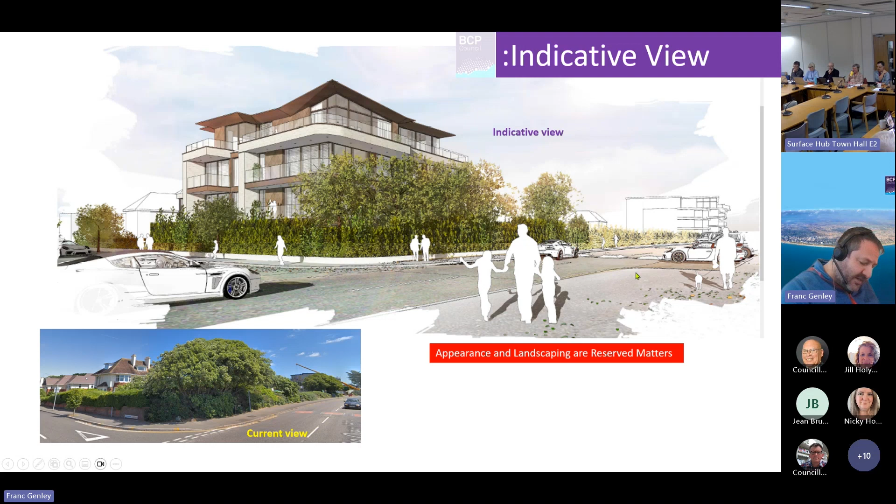So to the proposal. Outline planning permission is sought to clear the site and erect a single block of 13 homes over 4 floors. The proposal seeks to reserve matters relating to landscaping and appearance, so what you have before you are indicative elevations and indicative landscaping. What is proposed is access, layout and scale, which all form part of this submission. The scheme has been reduced in scale and height to the rear since submission, through negotiation, with changes made to the car park, the SUDs, waste and cycle storage, and to the unit mix to increase the number of 3-bed units.

With regards to access, a new vehicular crossing is proposed here, with the existing 2 access points made redundant and sealed back up into proper pavement curb edge. An electronic sliding gate would regulate access to the car park, but not the building. The lobby would have 2 doors, one in the car park and one to the street. Cycle parking is within the building, accessed from the car park. Bins are serviced from the road onto the entrance road, but residents would have access into the bin store area, so there wouldn't be any possibility of people coming from the beach and dumping their rubbish, because we have a gate at this end.

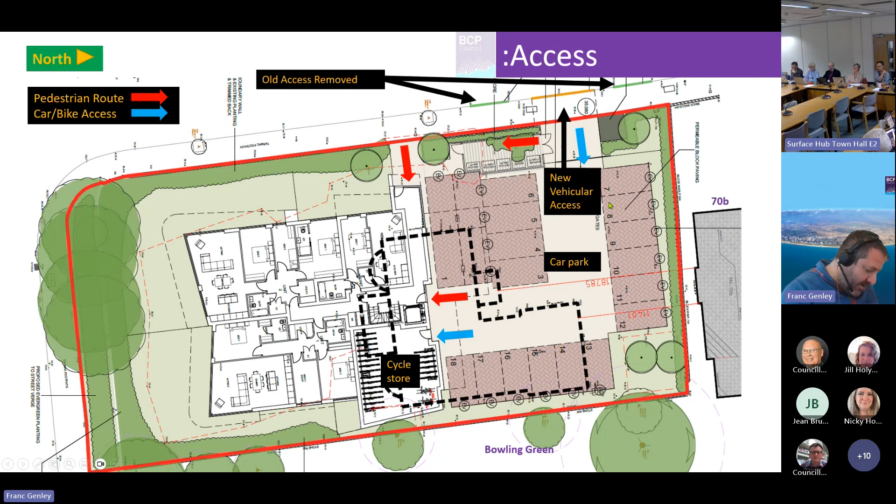In terms of scale, the proposal has a stepped footprint moving away from the rear of number 70B as it moves upwards. The interface distances are set out in paragraph 8 of the report. In total, we have 46% 3-bed, 46% 2-bed and 8% 1-bed, which means 6 3-bed flats, 6 2-bed flats and 1 1-bed flat.

The purple dashed line on these drawings shows you how the application was submitted, and the clear drawing shows what it looks like now as proposed. So there's been some reductions. This is 70B, this is Browning Avenue. You can see some levels have been pushed back further away, and there's been some slight design tweaks to indicate the potential for a bit of a feature on the frontage. Elevations are indicative, but what we're looking at is scale, so the position relative to those buildings is what's being fixed. How the elevations end up looking exactly is for reserved matters.

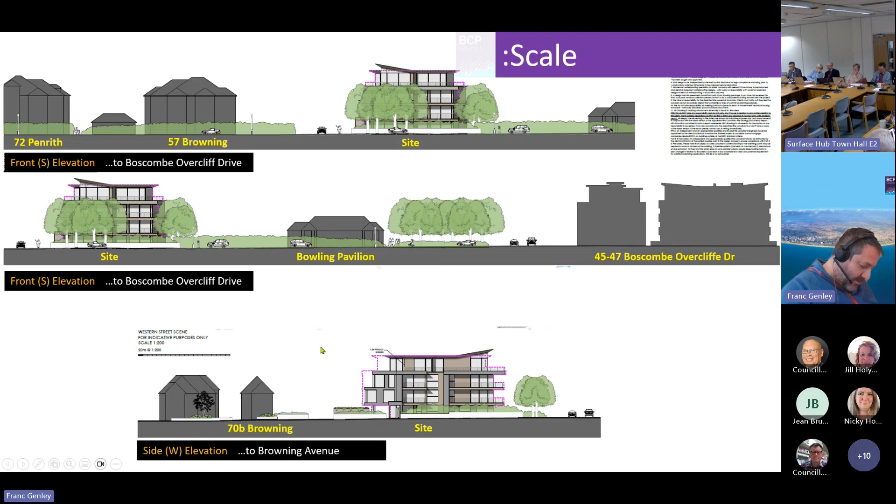Regards to site layout, come back to the plan you've seen before. The property would sit forward of the existing property position. Here you have the dotted line showing the current building, and this is where the proposed building would sit. Just to scan back quickly to the location plan, which gives us a clear view of building lines - you can see here on the top left, this is the position of the block of flats at 57, forward onto the street, and this is the position relative to that of where the building would come forward, sit forward.

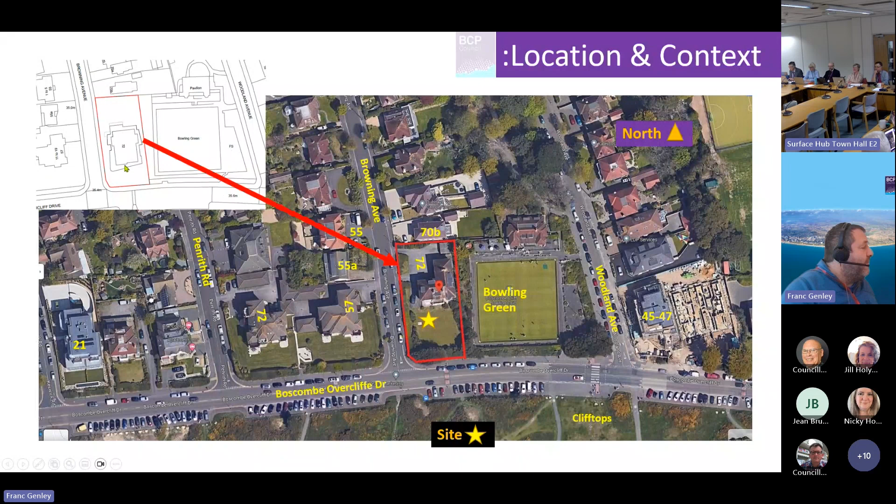Balconies and terraces are provided for all flats, bar the ground floor units which have use of gardens. They're of a practical size. The balconies project outwards, so what you see on this plan, the building line, the front main wall of the property is this - the dotted lines are where the balconies would project outwards. Primary windows would face seawards, south, onto Browning Avenue, or the bowling green, west or east, with limited glazing on the north, so there's not much on the back. At ground floor it's service and access, and then as you rise to first floor, it steps back into the building, increasing the distances.

46 cycle spaces are provided within the building, and 20 car parking spaces are provided. Bins to Browning Avenue, as I explained, are hidden behind walling and planting - earlier plans showed them being underground, but these have been altered now to provide above ground to improve serviceability. The garden area here is to be split into three: this family 3-bed unit here would have this garden, this family 3-bed unit here would have this garden, and this 1-bed unit would have this smaller garden.

With regards to internal layout, you have the plan pack, which shows more detail than this drawing. The flat plan repeats itself between floors, which is good for stacking, so you get fewer complaints between residents due to noisiness. Each elevation would feature windows lighting habitable rooms and spaces. Layout sets the position of those windows, so although we don't have appearance, we know where the windows will be, so we can assess amenity impacts.

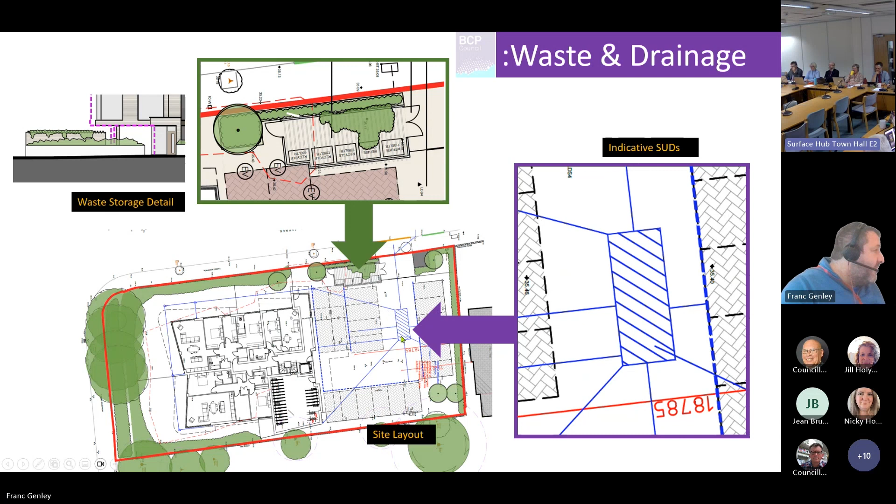This concludes the visual presentation. I want to summarise a couple of things from the report for members so everything's clear. Aside from the usual planning assessment, the report focuses a lot on heritage and the fallback demolition permitted by the prior approval process. Heritage issues are assessed in paragraphs 44 to 45 and 62 to 87 of the report.

There is a fallback position of permitted demolition, and that is relevant to any decision, but consideration must be given to the likelihood of that demolition actually happening. The matter is discussed in full in paragraphs 42 and 43 of the report.

The report, in concluding, sets out 3 policy conflicts. With regards to paragraph 164A, limited weight should be attached to the absence of one number visitor car parking space. With regards to paragraph 164B, limited weight should be attached to the loss of the non-designated heritage asset. Thirdly, since the publication of the committee report, the drainage issue discussed in paragraph 164C has been resolved. The addendum report explains how this element is no longer contrary to policy.

With regard to some other matters, the proposal would provide an off-site contribution of £140,573 to affordable housing, which is a significant benefit. It would also pay standard mitigation payments of £3,310 and a contingency of £5,000 towards off-site reptile habitat rehoming, should this prove necessary as a result of the condition requiring ecology surveys.

There will be no adverse impacts on adjacent occupiers that would warrant a recommendation for refusal. Conditions and reserve matters can satisfactorily control all other aspects for later determination. As a result of the changes to drainage and waste arrangements, a revised recommendation is summarised in the addendum report. The recommendation remains the same, that the need for an additional drainage condition is removed. Changes to the wording of some conditions are proposed, set out in the addendum report. Thank you, Chair. That concludes the presentation.

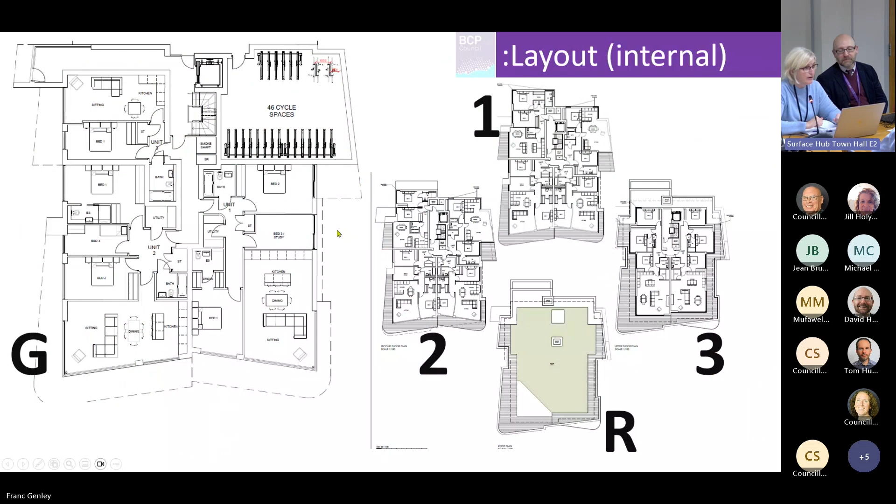Yeah. Yes, Chair, yes, I'll confirm that. If you look at the layout plan, at the top where the access is, there's a dark black line which shows an electronic sliding gate set back, so it would allow a vehicle to be clear of the road before it turns in. So the condition would prevent any changes, or we need to change the condition to tweak it to make sure it wouldn't allow for alterations of those gates, but there is a gate that is currently proposed on site as a sliding gate.

Councillor Rice: And from a planning point of view, do we have any opinion on providing gates to this type of development? Generally, I don't like gates, to make it a gated community, I wondered if we have any opinion on that.

I personally don't like gated communities. I've always in my career tried to not have them, and Bournemouth and Christchurch will have a similar approach that we want communities to be integrated. Here we are close to the sea and the coastal parking, where people attempting to turn or looking for parking spaces may cheekily come in. So the parking gate is considered appropriate here.

You can still be part of the community. That's why the condition words no additional gates, because what we don't want is gates then to be put on for the pedestrian element. People can't nip in with their bag of rubbish from the beach and put it in the bin store because it's locked. But we don't want to stop this building and these residents being part of the community by closing them off.

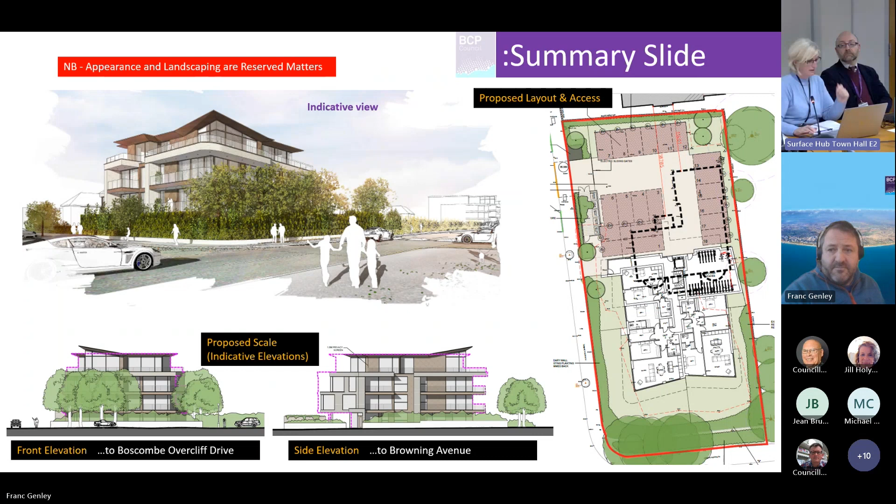Can I just add to that? If you actually look at condition number 1, there is a tree protection plan, an arbor method statement, and a tree constraints plan that's conditioned as part of the approved plans. That would ensure that any existing trees being retained, including those outside the site, would be properly protected.

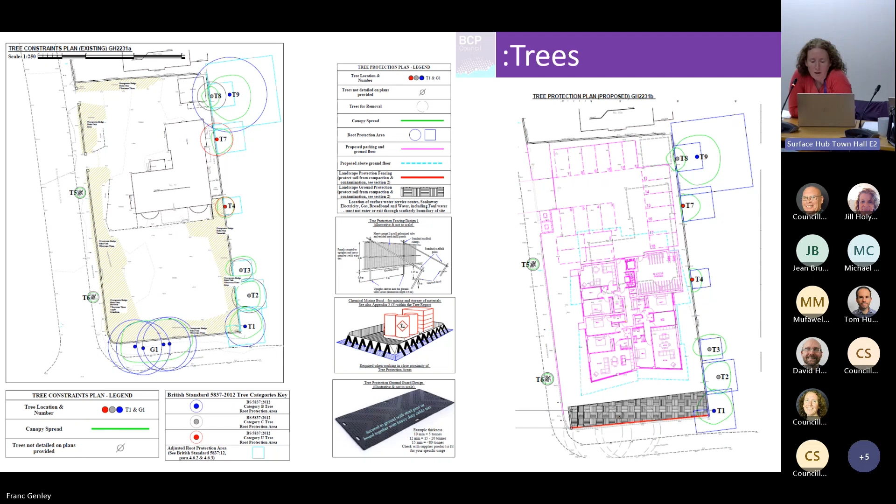Councillor Rice: Thank you. Yeah, just looking at the cycle storage - cargo bikes will be particularly relevant for that area, especially if there's going to be 3-bedroom and 2-bedroom flats, for transportation of small children. There's an over-provision of traditional cycle units. I was just wondering, there's 2 individual stands - I was wondering if there was anything specific, but also is there anything about providing provision of space for electric cargo bikes?

On the plan - and sorry, just one other aspect to that - obviously it relates to the entrance to the cycle space as well. The door is the same width as ordinary doors into the bedroom units, so whether that would accommodate a cargo bike - I wouldn't like whatever was designed there to restrict any of the residents from being able to get one.

Thank you, Chair. Yeah, of course I can. The proposed space is sufficient for 46 traditional cycle spaces. Obviously, at outline stage, we're looking at the general provision and the layout of the building. The internal layout of this is subject to a condition - we want to see more detail of the kit that's going in there, as ever these things are evolving as we move forward. Each of the flats, the spaces for the cars are to be allocated to each of the flats, so there will be a car parking space associated with a flat.

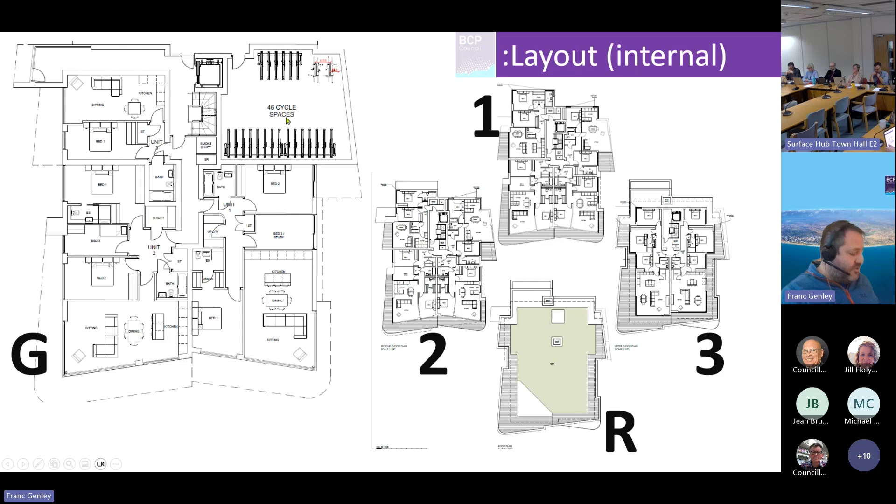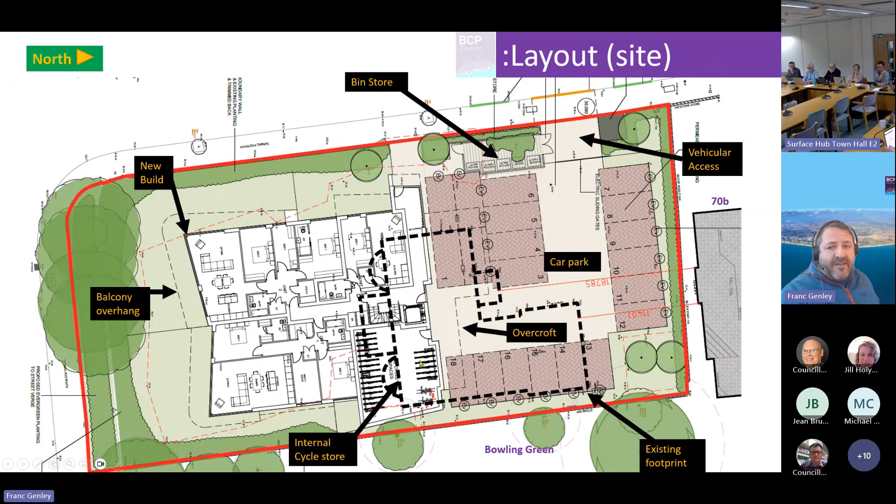The issue is also to do with bin stores. Increasingly the waste team are asking for a space for boxes and detritus, so when you move in or buy a new television, all those big things that don't have anywhere to go. An overflow space is something that's been requested, and we have made provision for it. The same within the cycle area—there'll be provision within the condition to deal with how that mix is going to satisfy the SPD on this, but nothing specifically at this point about cargo bikes.

Thank you. I can appreciate that they could use their car parking space, but I don't imagine they're allowed to put any kind of shed on it to accommodate a cargo bike and protect it from weather, because they're obviously quite expensive pieces of transportation.

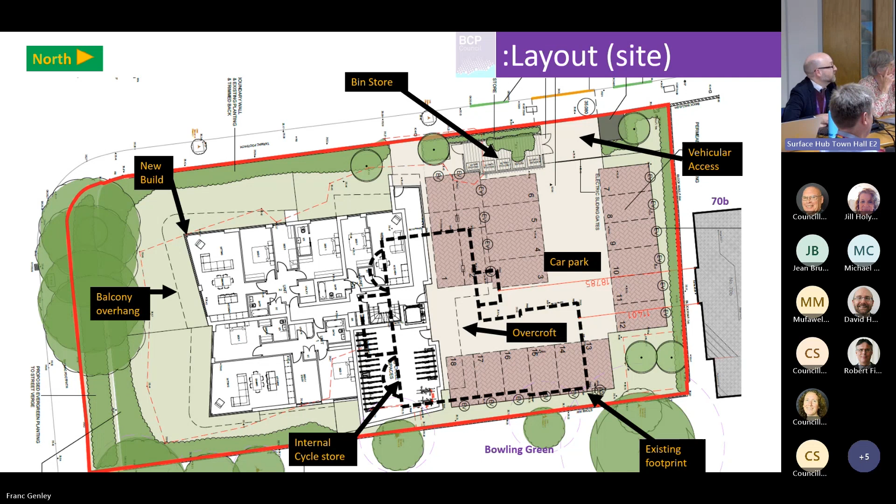So there would need to be somewhere protected from the elements, let alone theft. But can we add a condition that cargo bikes are considered for the cycle storage? Off the top of my head, I don't think that's in our adopted parking SPD in terms of requirements. So what we would do is consult with highways officers when the reserved matters come in, so we can make sure it's ticking the box as far as our adopted guidance is concerned. The chair would be going beyond what we've adopted as guidance to ask for something that isn't in the guidance at this stage, so we can't.

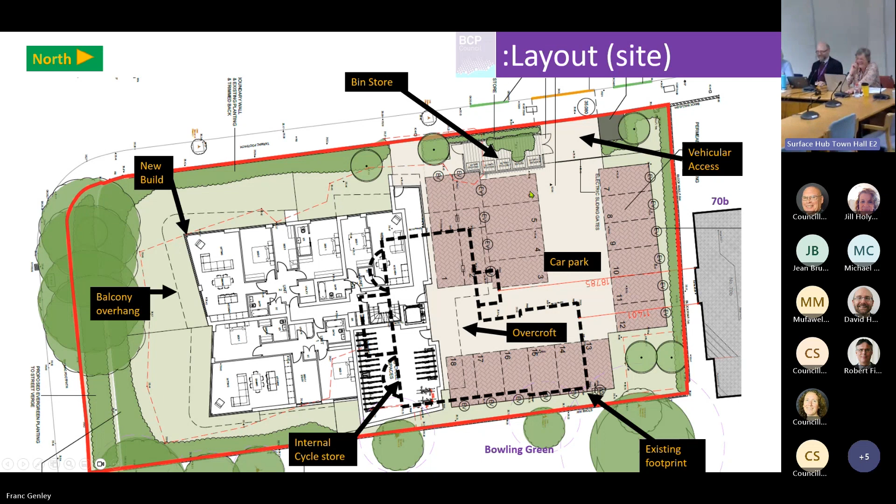But the applicant has heard the discussion. So if there's no more questions, I'll open the meeting up to debate.

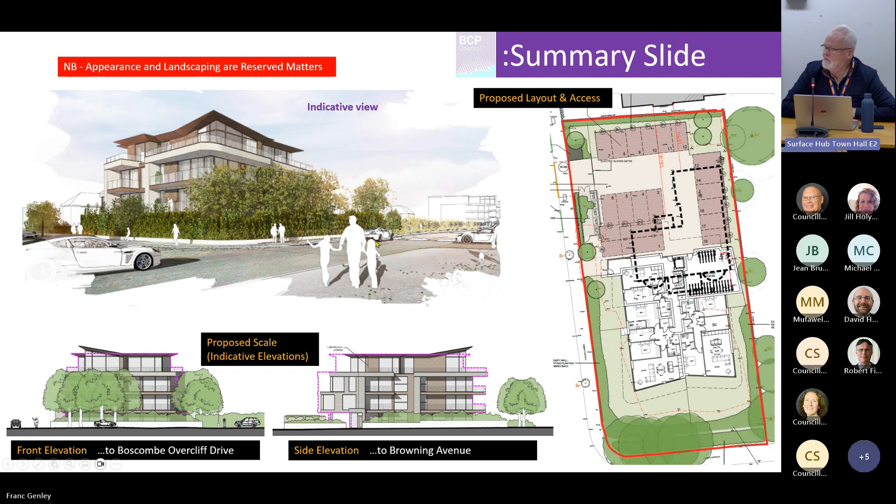Councillor Sidwell: I think this is a unique proposal in my time on this committee for actually having affordable housing spend, full EV chargers and solar panels. The thing that troubles me is what it looks like, and that's why I mentioned the heritage aspect, because it does seem like we've taken more notice of recent developments as opposed to historic ones, and I would have liked to see a nod towards the property it's actually replacing. It just feels a shame to look and say it's the same as all the others. Do we really like all of the others?

Other than that, there are some things here we'd love to have seen on previous developments, so I can't complain about that. To be fair, I think the report says they don't like all the others—the officer doesn't like the ones across the road, that's my reading of the report. It's still very modern, and it was pointed out it's in keeping with the modern developments of the noughties.

Councillor Tarling: Yes, thank you. I'm going to disagree with Councillor Sidwell here on the issue of heritage. There are lots of this type of house in this area of Boscombe and Southbourne. Not that many left on the seafront, and the seafront is being developed for flats, yet you don't have to go far back inland to see these large, 100-year-old turn-of-the-century Victorian houses of this style. So I don't think there's a shortage of this type of property.

I think the point being made about the types of flats is we've got some noughties flats, some glass and interesting brickwork type houses, then the stuff that's probably slightly earlier, types of flats going back to the 80s. As is the want of this type of seafront development, the developer's going to build what is most in vogue at the time, and I think it is of the fashion at the moment.

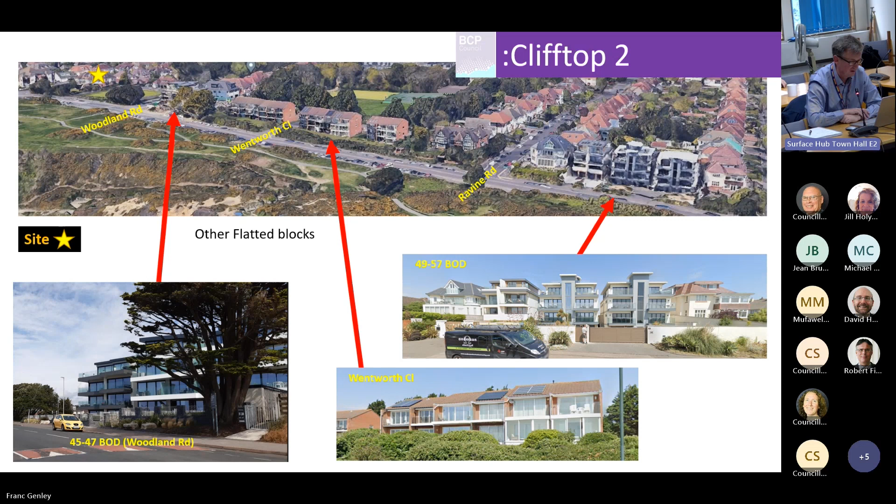This is the 2020s style of building at the moment. I'm sure when we get to the 2030s there'll be a slightly different style, different materials. But I think it is in keeping with what is happening further down the road. So I'm happy to support the recommendations as laid out by the officer.

I thank Councillor Farquhar as well for his very honest introduction, the fact that he's consulted with the neighbourhood plan and his residents and supports the scheme. So there's a lot to recommend it, so I'm happy to make a proposal now that we accept the recommendations along with the comments already made. Thank you. Have I got a seconder for that?

Thank you, Councillor Adams. Sorry, Chair, can I just confirm the recommendation is as per the addendum? Yes, as per the addendum.

And Chair, does the councillor wish to pick up the issue of the gates as well? I'm satisfied that the gate question was actually answered in the fact it's already conditioned, and that the access is not a gated community, that there will be pedestrian access, and that Mrs. Browning mentioned it's not going to be a 2-metre high gate, which satisfied me that we don't need to add a further condition.

Chairman, I think the only slight issue is a slight ambiguity. I think Mr. Hodges identified that in condition 22, where it talks about no other gates, and it's just being clear whether the permission granted was allowing gates. So it might be beneficial to give some power to the head of planning to enable them to check that point and tweak it if necessary to give clarity to what's permitted, if the mover is prepared to accept that. Yeah, what the officer just said.

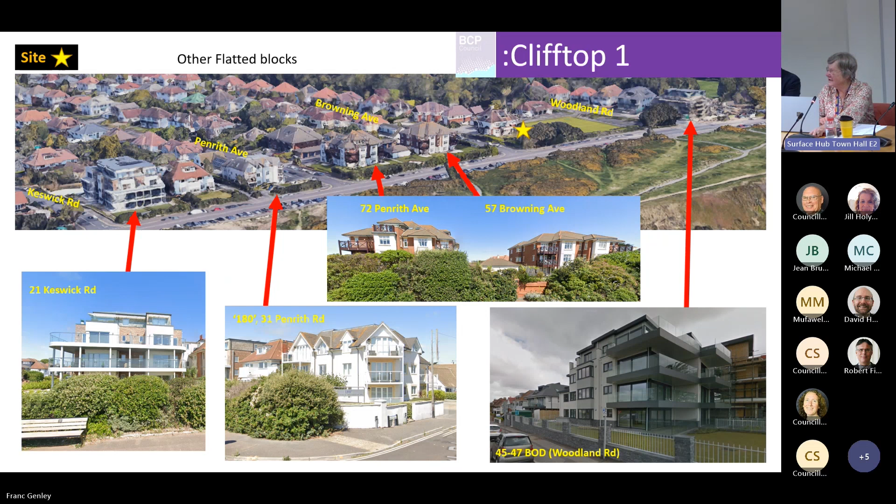Those in favour of accepting the recommendation with the conditions and the 106 agreement, vote now please. So that is unanimous, Chair. Thank you.

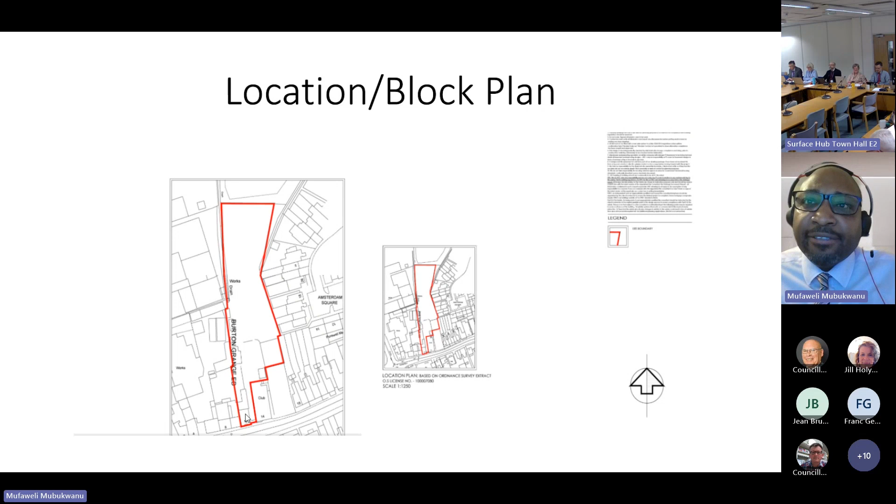The application seeks to demolish existing buildings and erect a detached garage. So basically, that is the site. It's unusually larger than the neighboring properties, so that is the extent of the garden, and the flat is further down there. This just shows the existing elevation and floor plans of one of the buildings that's proposed to be demolished. I'll show you furthermore down the line in the photographs.

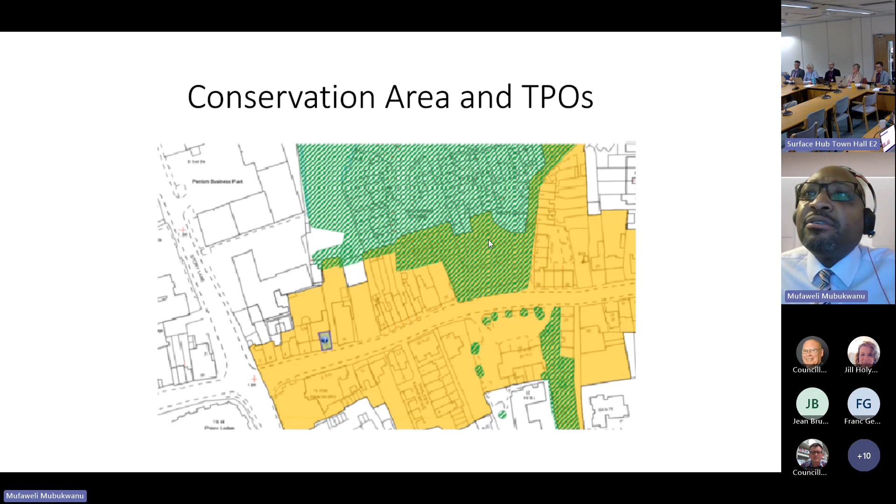So to put everything into context, part of the property itself is actually within Purewell Conservation Area. The proposed unit to replace the existing is just outside of the conservation area. So the amber area shows the extent of the conservation area on this part of Purewell, and the green hatching shows the extent of TPOs. So that is the proposed site plan, and the unit will be erected there using the existing footprint of the building.

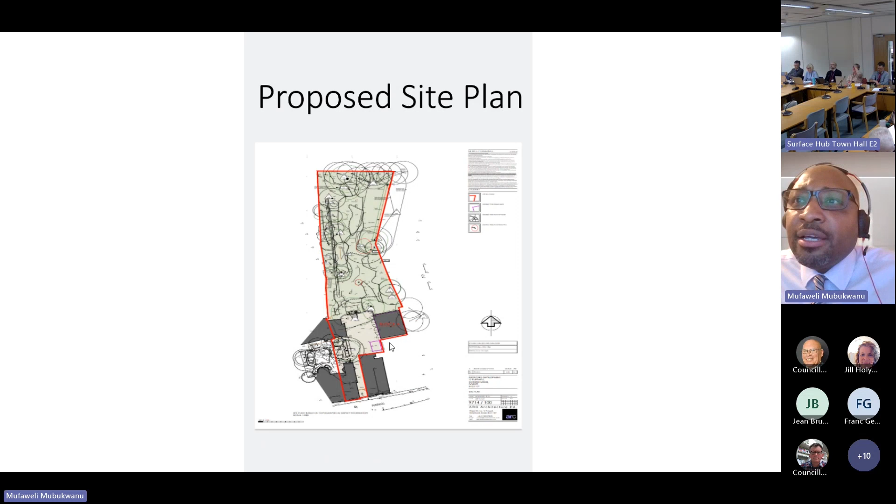Right, I hope you can see these plans clearly. I had a bit of problems trying to tweak it so that they appear much larger, but I'm more than happy to share another drawing just to help members see the extent of the proposed building. So the mauve outline just shows the existing building to be demolished, and shows the relationship of how the roof ridge will be raised.

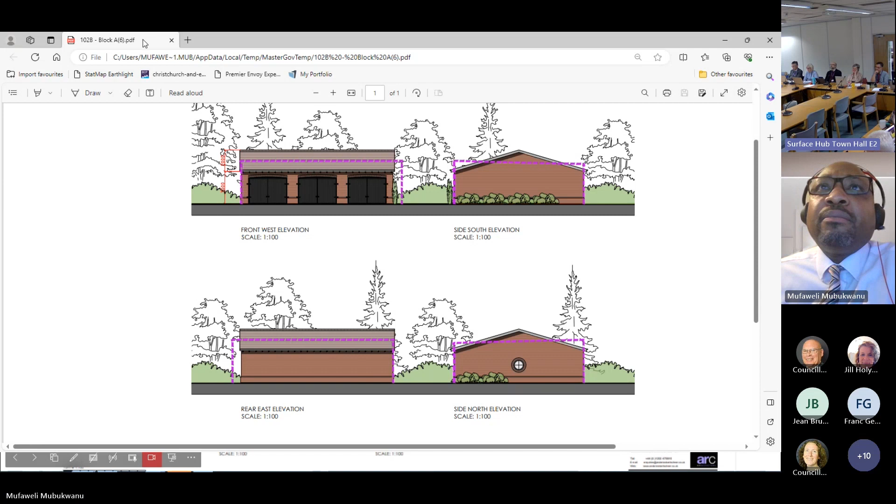So in regard to the fact that the site is actually outside of the conservation area, consideration has been given to the setting of the proposed development within the conservation area, and to the heritage assets. So in this instance, it's accepted that the ridge will be much higher than the existing, but due to the low eaves height, I think that mitigates it, together with the proposed materials, which will be similar to the adjacent listed building. So my assessment finds that it is acceptable.

So the scheme has acceptable impacts on the setting of the conservation area and the actual listed building. Regard has also been given in terms of paragraph 202 of the NPPF. This is to do with the impact - it says the impact must be weighed against the public benefits of the proposal, including securing its optimum viable use. In this instance, obviously, it is residential.

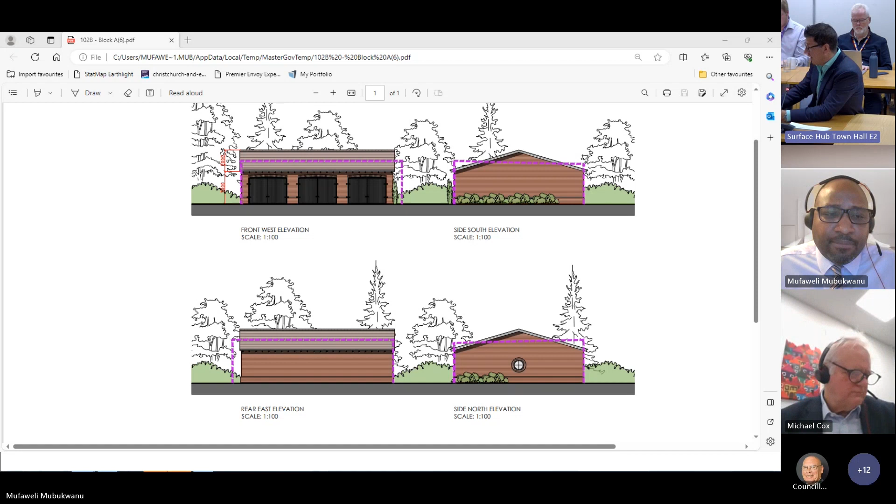The existing building is of poor quality and considered to have a detrimental impact on the setting of the conservation area and listed building. The proposal will involve a modest increase in height, but on the other hand, will have a design more appropriate to the conservation setting, with design and materials being more fitting. It is considered the proposal represents an improvement over the existing situation in terms of conservation and heritage, and this is recognised by your conservation officer, as confirmed by Mrs. Jean Brunning.

As the proposed building is on the footprint of the existing building, there'll be no harm to trees. The tree officer now raises no objection, subject to a suggested planning condition, which the applicants are happy to agree to. The tarmac hard standing to access the proposed building already exists. No vegetation will be lost.

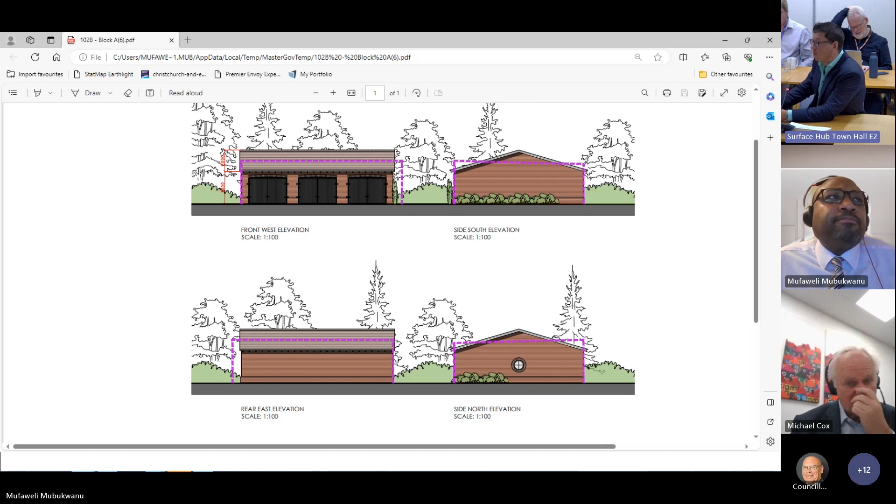Second, neighbour amenity. As you've seen, the proposed building is virtually the same size as the one it replaces, actually slightly smaller in footprint. Whilst it uses a pitch roof as part of its traditional design, the key is that the eaves level on the residential boundaries to the east would not be higher than that of the existing building. The pitch is as shallow as possible for a tiled roof, and with the roof pitching away from the neighbouring properties and gardens, the proposed building will have a negligible effect on daylight and outlook, particularly taking into account the surrounding trees and taller building nearby.

We understand neighbouring residents' concerns about the possibility of more extensive development on this site adjacent to their rear boundaries, but the scheme must be judged on its own merits, and this is not what is being proposed here. This proposal is for a simple replacement residential outbuilding.

Finally, flood risk. This has been raised by some local residents. The proposal is for a replacement domestic outbuilding with no habitable accommodation and finished floor levels no lower than the existing building, so the proposal would not place property or people at greater risk of flooding than the existing.

As the proposed building would have a slightly smaller footprint than the existing building, it would not displace more flood water and increase the flood risk elsewhere.

Councillors, you are being asked to decide on a replacement domestic outbuilding, which, as acknowledged by your conservation officer, represents a betterment to the setting of the conservation area and listed building, and in your planning officer's judgment is of sufficiently similar scale to the existing not to have any detrimental impact on the amenities of neighbouring residents. I hope you agree with all of your officers' recommendation to grant planning permission and vote in favour of approving this proposal accordingly. Thank you for listening.

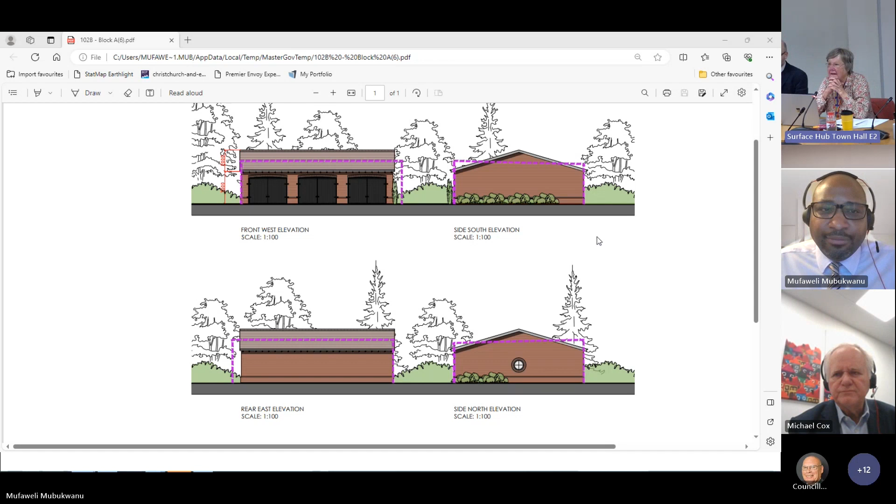Thank you, Madam Chair, and thank you for the opportunity. I would like to welcome the words given by the officer in terms of this application. I appreciate this is a very marginal case, but I think some of the points made by the residents need to be borne in mind and need to be considered in terms of the committee's decision. In particular, I'd like to emphasise that this is a higher level than that exists at the moment and will have a detrimental effect on the neighbours, certainly to the east.

In terms of the one photo in there, the view from Purewell, clearly it will not affect that, and I didn't feel that was very worthwhile, and in fact quite irrelevant. It's the view from the other side, from the east, that was important. So I do think there will be some loss of light, as was clearly demonstrated in Mr. Tozer's application to some of the residents on that side.

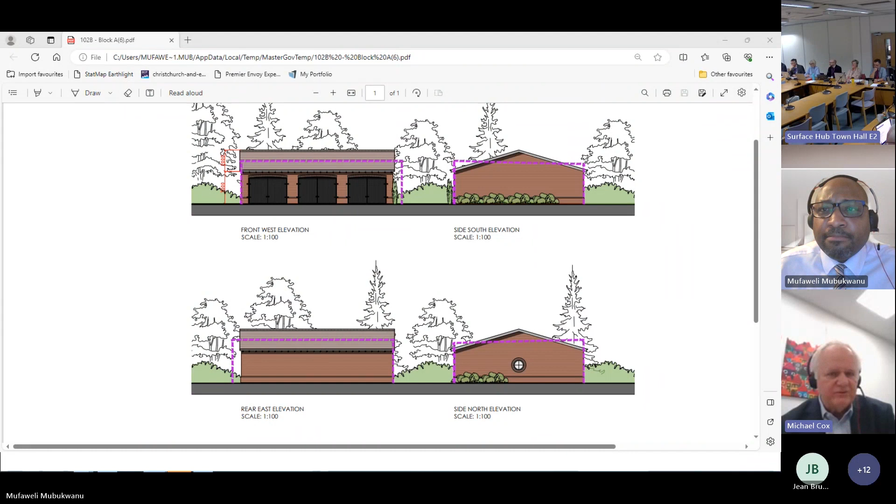I think there was a comment made by the officer about the fact that there's no significant ecological benefit mentioned, and I would challenge that insofar as this particular area does have quite a significant amount of ecological benefit to the area. However, I do appreciate this particular building will not have a particularly detrimental effect on it.

I also think that the officer and the applicant has mentioned the fact that there will be no flood risk, but I think, as was demonstrated by Mr. Tozer particularly, that the way in which the downpipes are now going to be configured, we need to be very careful about this particular area, because there is, as was mentioned, some significant future flood risk. So those would be the points I would like to make.

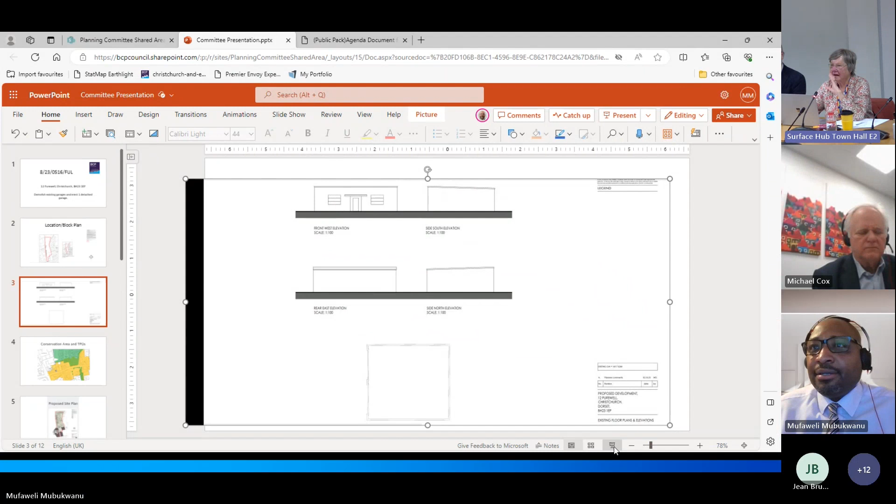Is that the one, Councillor Flagg, or the other one? Just bear with me. Yeah, I think I know the one you mean. That one. Yeah, that's it. Thank you.

Thank you, Chair. Is it possible to advise the committee whether the trees that are in that photograph have been the trees that have been removed? Is that a question you can answer? Yes, thank you, Councillor.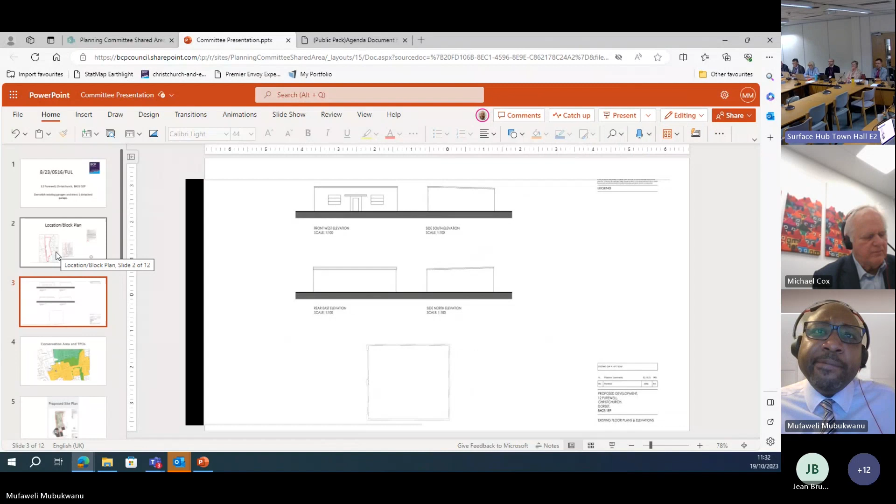So the trees that have been removed, if I bring up the site plan, I think that would be a bit more clearer. So the trees that have been removed are sort of further away from the actual existing structure. So what they did is, from the site visit, they left 3 trees in between, where the new hard standing would have gone on the other side. Then the 3 trees would have been preserved, and those are the 3 trees that have now been TPO'd.

But the trees within the photograph are actually existing. They're still in situ.

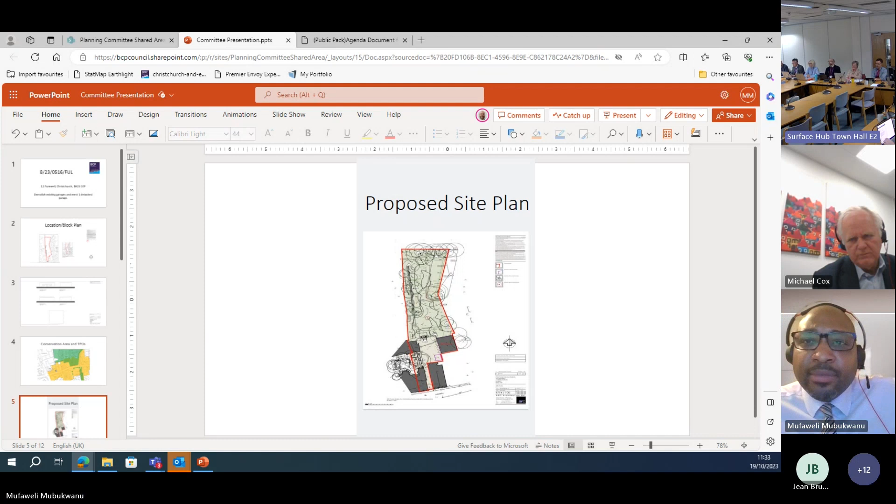Happy? Thank you, Chair. Just to confirm then, on the drawing 9714/100, which is up on the screen, those trees that are existing are marked up as G11 in the triangle there. Am I correct?

Yes, I'm just trying to get my main plan up on screen. Just bear with me, Councillor.

Well, they're not necessary because those are behind that block, aren't they? They're not the ones that we could see on the photograph. So the ones you could see on the photograph, in that area there, with the triangles - so those are the trees there, and there's trees on adjoining neighboring property there.

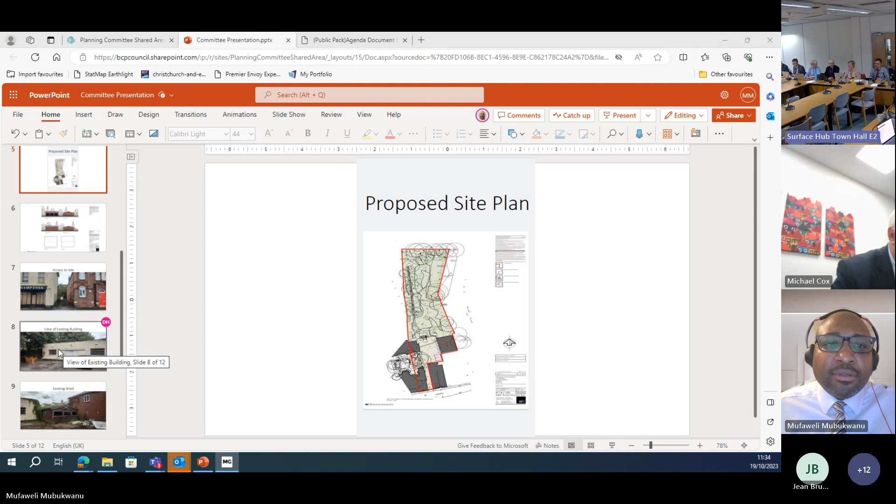So, Councillor Flagg, are you talking about the white circles, G11? That's correct, yeah, because they're outside the site. Yes, but so they're there. Yes, but they're outside the site, so they will not be - that's not part of the application, and therefore will not be touched by the developer. What the residents of the property that they're on do is another matter.

Right, so you're happy now. Thank you. Any more questions?

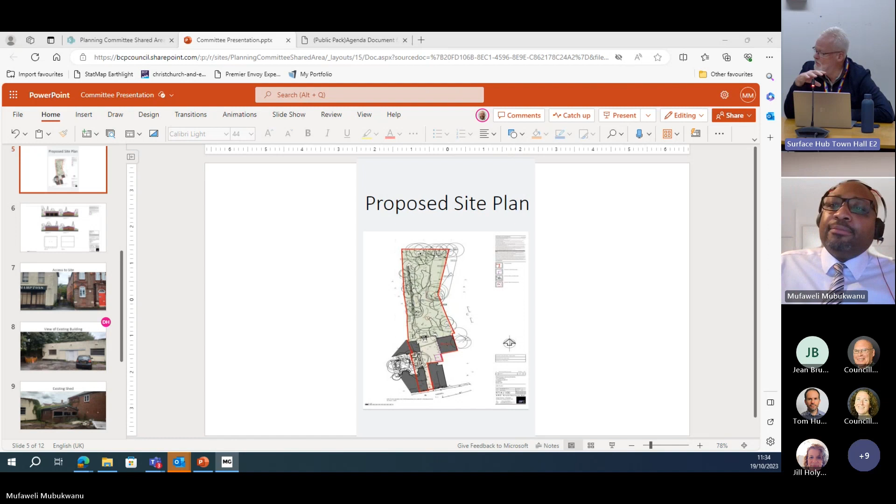Councillor Sidaway. I just wanted to pick up on the flood risk, and I was interested in the comment that the downpipes were key to that and the position of them. I wonder if the officer could explain whether they've moved from the existing one, and whether that is a real issue or not.

Thank you, Councillor. In terms of the scale of this application, the applicant has satisfied the current regulation. It's one application that does not require a flood risk assessment, so I would find it difficult to refuse an application based on flooding in this instance.

Yes, if I could just add to that, also the footprint and in fact the area of roof that the property has is pretty much unchanged, so we wouldn't expect there to be any greater flood risk as a result of the replacement.

No, I absolutely accept that, and I read that into it. I think it was more the question that - what was being said was that if you position the downpipes in a different location, now it is a sloping roof, all that water will be going into a location it isn't currently going into. I just wanted to know if that's the case, and that's why there's an increased flood risk. The fact that it's the same size, I absolutely get.

So, did you get that question, Mr. Mubukwanu? That basically it's - are they using the same soakaway, I suppose?

Yeah, I don't believe it will increase the risk of flooding from what's already existing. It's just obvious the positioning will change due to the proposed roof structure. But in terms of flooding, I believe that the risk still minimal - it shouldn't increase from what it is at the moment.

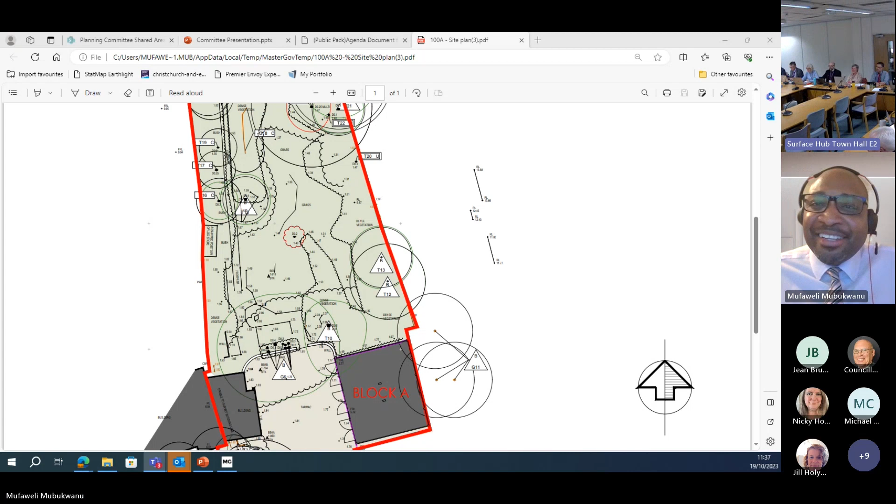I think that's the very nature of the objection, though, isn't it? It may seem a minor point, but I think it's worth raising. I think we're probably getting an answer possibly from Mrs.

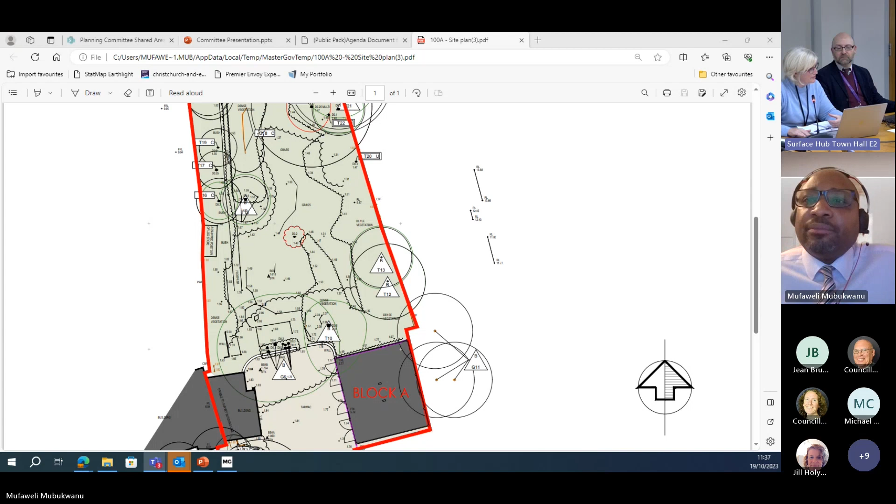Chair, I think the concerns were raised when there was going to be that additional area of hard standing, which has now been removed from the proposal. So now all you've got is the area of the existing slab where the new building is going to go. But originally there was an additional building and an additional area of hard standing, which is no longer part of this proposal. And I believe the objector knew that.

They still objected to it, so I thought it was worth raising, even though it may be a minor point. As you said, Chair, if that water is now going in, it's missing the soakaway. Where is it going? Is it going to a new soakaway? Is that the idea?

I'm looking for information, if possible, from the officer. Chair, there's no new proposed soakaways other than the use of what's existing. But if members feel that we do need a new soakaway, I believe we can add a condition to the decision notice requiring them to submit plans showing where the new soakaway would be located.

Okay, I think you've just answered the original question. The existing soakaway will be used. What was that? I thought that's what he said.

Chair, what we could do, if members have concerns about this, is say that in the event a new soakaway was proposed, we could condition that. Otherwise, we would assume they are using the existing one. So we could condition that any details of a new soakaway be submitted to us.

Would that satisfy you, Councillor Sidaway? I think so. I don't want to make a big point of this, but where does the water go currently? Does it go into a soakaway or a rainwater drain? If it's just hitting the ground, where is it going? That I think is the concern raised by the resident.